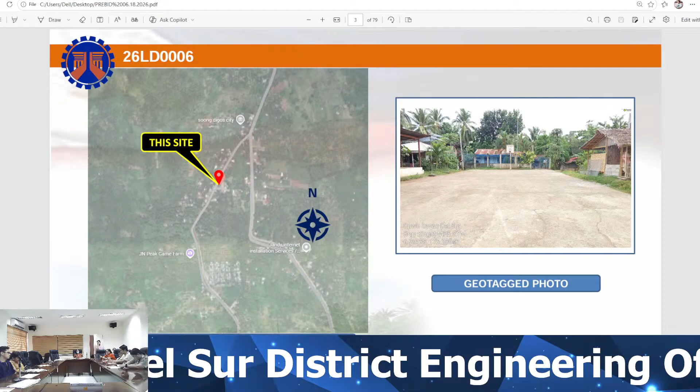For contract 26LD0006, contract name: construction of multi-purpose building gymnasium, Barangay Kiagot, Digos City, Davao del Sur, with appropriation amount of 8 million pesos and ABC amount of 7,920,000 pesos, with a contract duration of 150 calendar days, funded under 2026 GAA, RA 12314.

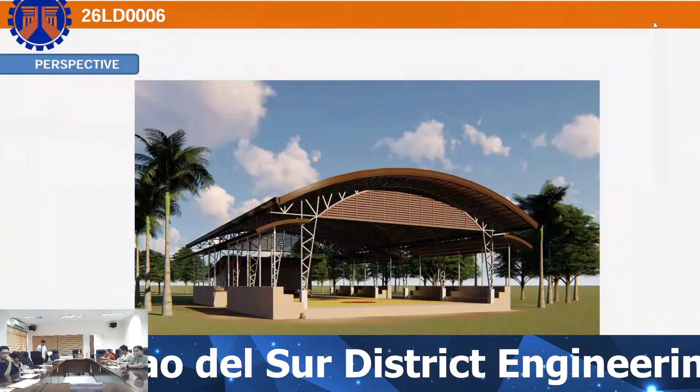Here's the perspective of our proposed gymnasium. The project will be located at Barangay Kiagot in Digos City.

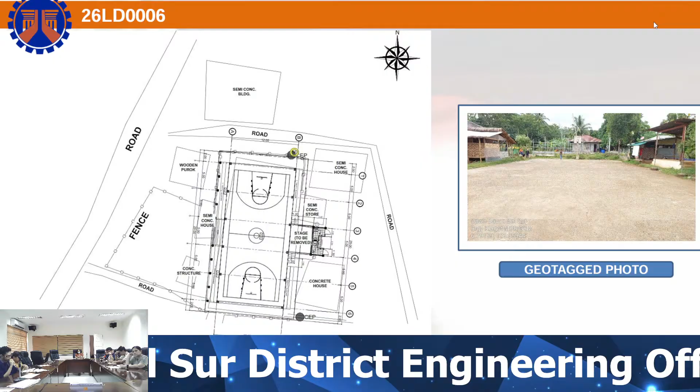Here's the vicinity map and geotag photo of the existing play court. Here's the site development plan for the project, which will be placed on the existing play court. The LGU provided a transfer certificate of title for the lot ownership.

For the scope of works, we have the 25 by 12 meters play court. The existing play court will be replaced with a new one.

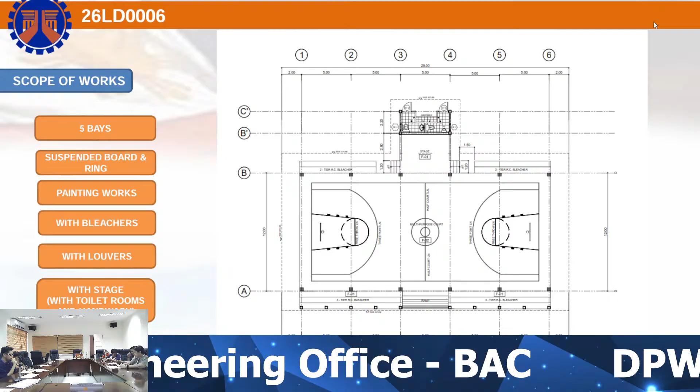Next, we have the suspended board and ring, painting works, bleachers - 2-tier at the upper side, 3-tier on the other side. Then we have the louvers, and we also included a new stage with toilet rooms and hand wash at the back.

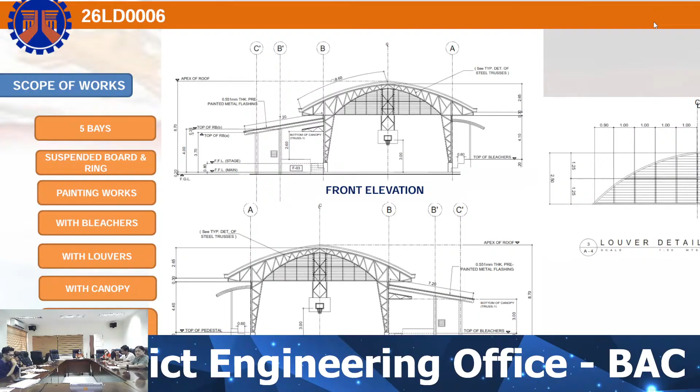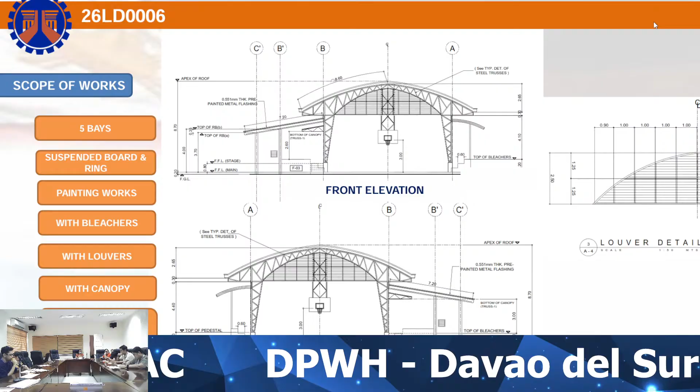Here's the elevation for the gymnasium, showing the front elevation, rear elevation, and louver details. Again, we have the 5 bays of trusses, the suspended board and ring, painting works, bleachers, louvers with canopy, and the stage.

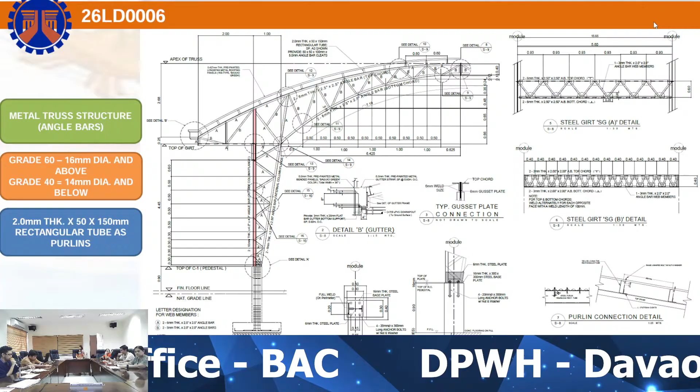The project will mainly be composed of metal truss structure with angle bars, then grade 60 and grade 40 reinforcing steel bars on the reinforced concrete pedestals, and 2mm thick by 50 by 150mm rectangular tube for the purlins. Here's the typical detail for the truss.

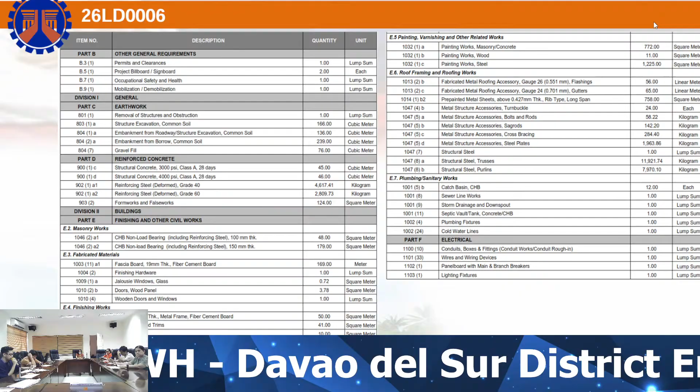For the summary of quantities, we have the general requirements, permits and clearances. Under earthwork, we have removal of structure or the existing play court, excavation and embankment. Then under reinforced concrete, you have the 3,000 and 4,000 PSI structural concrete, and reinforcing steel, grade 40 and grade 60.

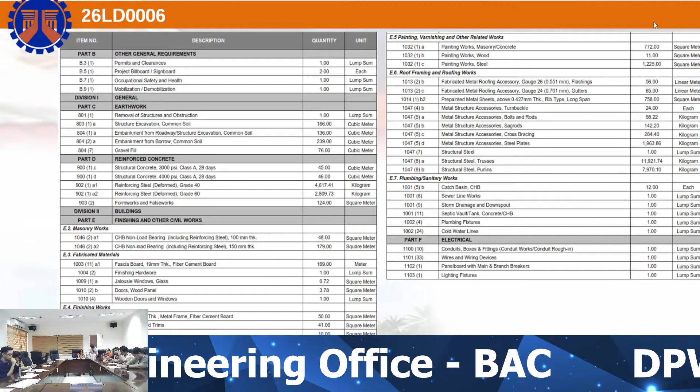Under finishing and other civil works, you have masonry works, fabricated materials such as doors and windows for the attached toilet. Finishing works such as tile works on the stage and toilet, reflective insulation, ceiling, painting works, roof framing and roofing works. Then under plumbing or sanitary works, we have the catch basin, sewer line works, plumbing fixtures, cold water lines, storm drainage and septic vault, and electrical works.

For contract ID 26LD0062, the contract name: Rehabilitation of Multipurpose Building Gymnasium, Remedios Saplala Elementary School, I-129756, Barangay Matti, Digos City, Davao del Sur, with appropriation amount of 5 million pesos, and ABC amount of 4,950,000 pesos, with a contract duration of 120 calendar days, funded under 2026 GAA or RA 12314.

This project is a rehabilitation for an existing gym. Here's the photo of the dilapidated gym. The project would be at Remedios Saplala Elementary School.

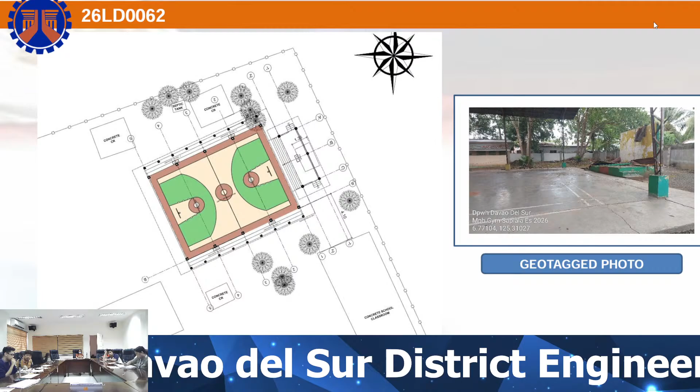Here's a site development plan showing the existing play court. The school provided an original certificate of title for the lot ownership. For the scope of works, we have...

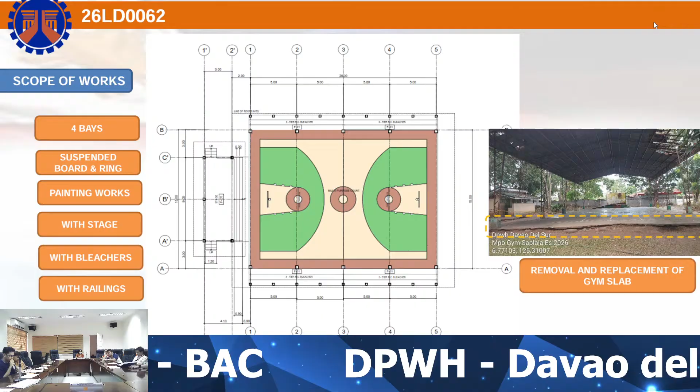An overlay, removal and replacement of the existing gym slab due to dilapidation. Then we would install a suspended board and ring, painting works on the play court and the whole structure. And we will replace the stage, and provide bleachers with railings.

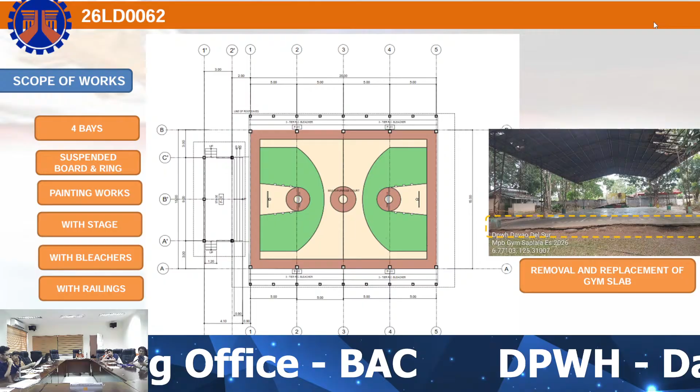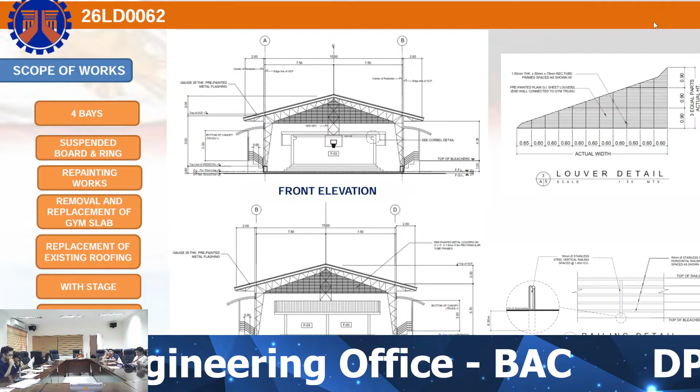Here's the elevation for the proposed rehabilitation. We provided a suspended board and ring, repainting of the whole structure, removal and replacement of the gym slab, replacement of the dilapidated existing roofing, then stage, bleachers, and railings. We have the 3-tier bleachers to be installed.

Here's the side elevation showing the bleachers with railings. We will replace the dilapidated roofing sheet and repaint the existing metal structures.

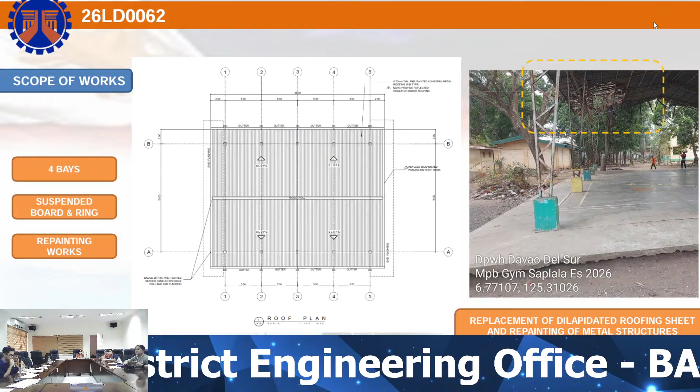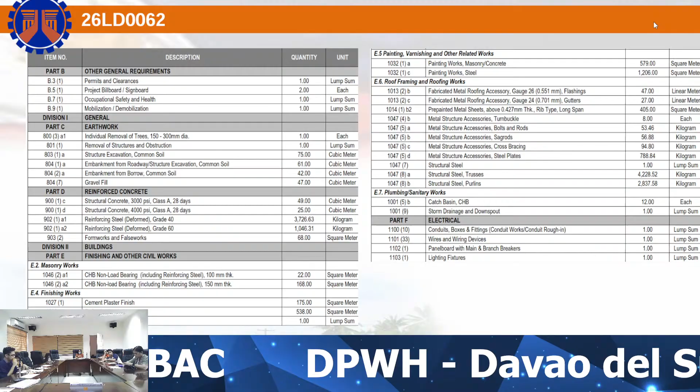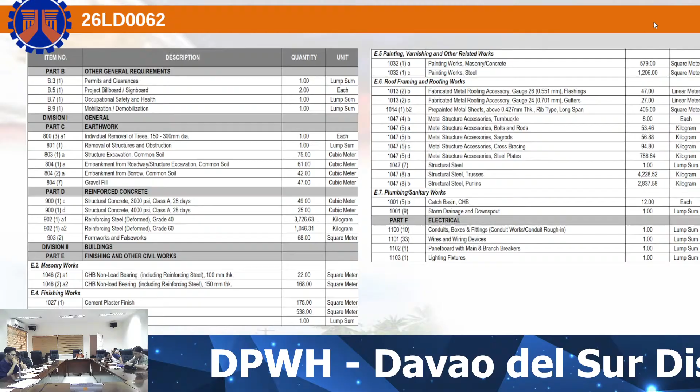For the summary of quantities, we have the general requirements, permits and clearances, earthwork which is removal of structure and embankment. Then under reinforced concrete, we have the 3,000 and 4,000 PSI structural concrete with grade 40 reinforcing steel. Under finishing and civil works, you have masonry works, finishing works, reflective insulation and railing, painting works, roof framing and roofing works, plumbing and sanitary which includes storm drainage, catch basin and downspout, and electrical works.

For contract ID 26LD0074, with contract name: construction of multi-purpose building, office building, Carubang, Astorga, Santa Cruz, Davao del Sur, with an appropriation amount of 5 million pesos, an ABC amount of 4,950,000 pesos, with a contract duration of 120 calendar days, under 2026 GAA or RA 12314.

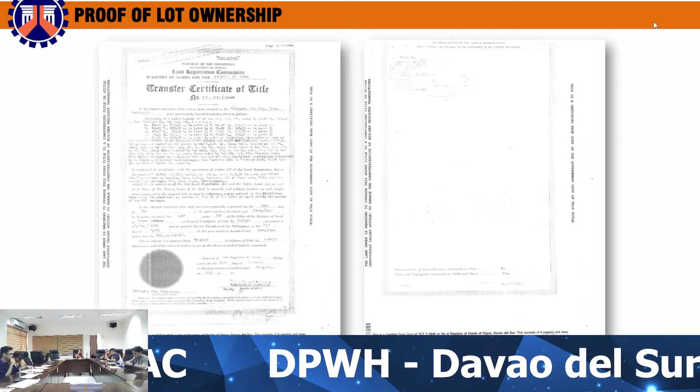Our project will be located at Carubang, Astorga, Santa Cruz. Here's a vicinity map, which is near Bison Elementary School. Here's the geotag photo. The LGU provided a transfer certificate of title for the lot ownership. Here's the site development plan showing the proposed building, which should be located near their existing gym and tribal hall.

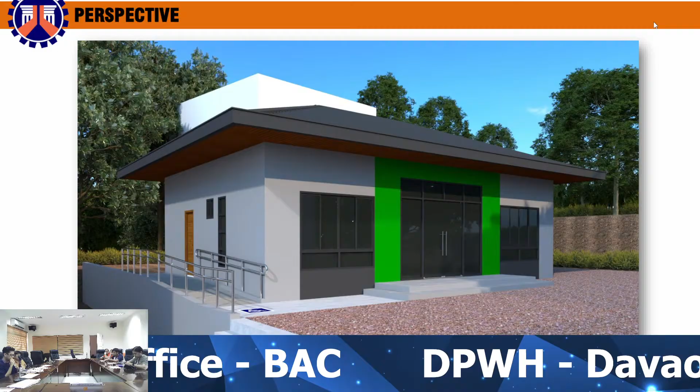So here's the proposed one-story building, office building for Carubang, Astorga.

Here's the floor plan, which has a total floor area of 96 square meters, with dimensions of 12 meters by 8 meters, with the spaces provided are the following: porch, clerical office, head office, pantry, male and female PWD toilet, room,

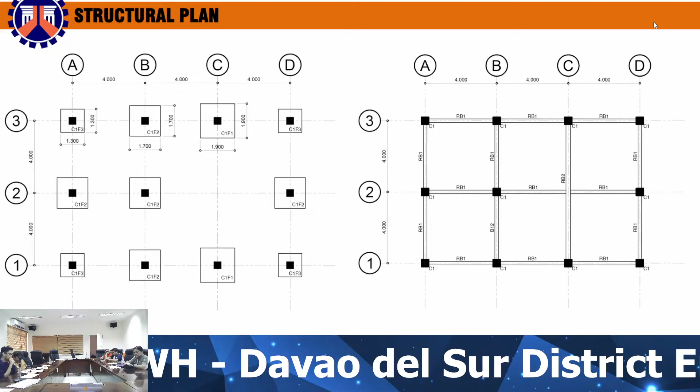and around. So the project will be composed of reinforced concrete columns and beams, next, and steel trusses for the roof framing.

So again, for the summary quantities, we have the general requirements, permits and clearances, earthwork, the removal structure, excavation, embankment, reinforced concrete. We have the 3,000 and 4,000 PSI structural concrete with grade 40 and grade 60 reinforcing steel.

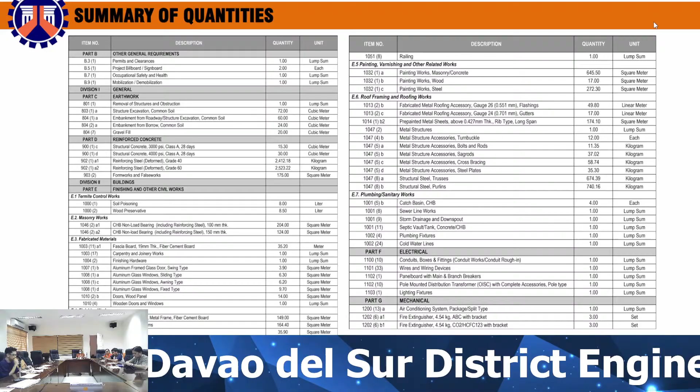Then under finishing and other civil works, you have the termite control works, soil poisoning and wood preservative, masonry works, fabricated materials such as the doors and the windows, finishing works such as the ceiling, tile works, and then we

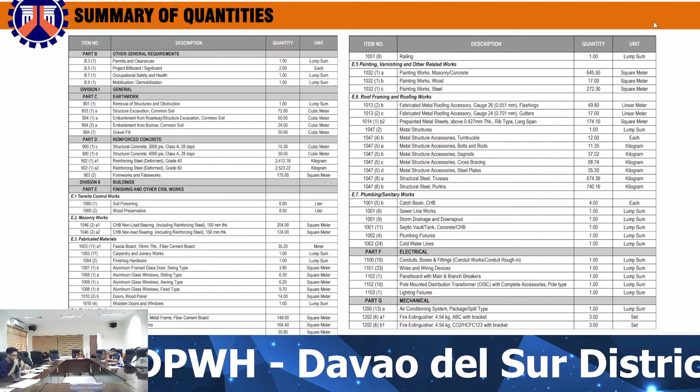have painting works, roof framing and roofing works, plumbing, which includes the catch basin, storm drainage and downspout, sewer line works, cold water lines, and septic vault.

Then electrical works, then under mechanical works, we have an air conditioning system and fire extinguishers provided.

For contract ID 26LD0109, or contract name, construction of multi-purpose building, sleeping quarters at Girl Scout, Barangay Matti, Digos, Davao del Sur, an appropriation amount of 9,500,000 pesos, ABC amount of 9,405,000 pesos, with a contract duration of 150 calendar days, funded under 2026 GAA or RA 12314.

So our project will be located at Barangay Matti at the Girl Scout compound. Their office provided a transfer certificate of title for the lot ownership.

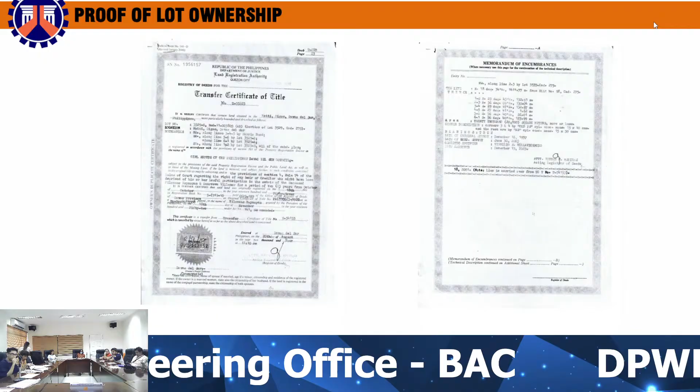Next. So here's our proposed one-story building. It will serve as sleeping quarters or a training hall as well.

So next, here's an open plan. Here's our floor plan with 250 square meters floor area or 10 meters by 25 meters dimension with the spaces provided: a main entrance, sleeping quarters, and will be served also as a function hall as well.

So it's an open plan. Restrooms for the male and the female, also catering to PWD, mess hall, and then service entrance or emergency exit.

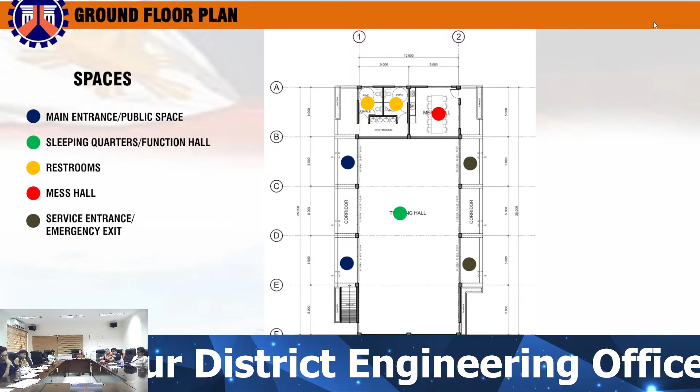The building would mainly be composed of wide flange beams and columns or I-beams.

So for the summary of quantities, we have the general requirements, the permits and clearances. Earthwork, we have the embankment, excavation, reinforced concrete, we have the 3,000 and 4,000 PSI structural concrete, grade 40 and grade 60 reinforcing steel.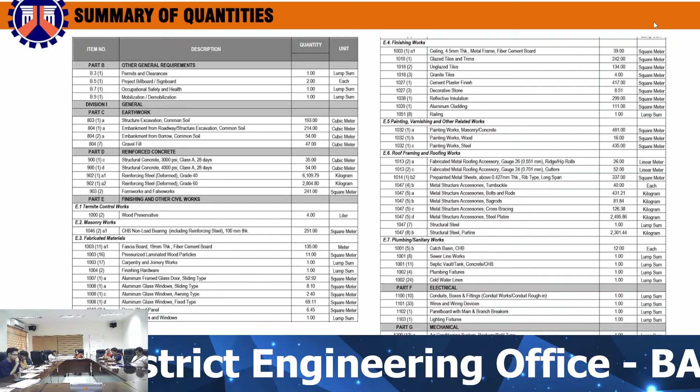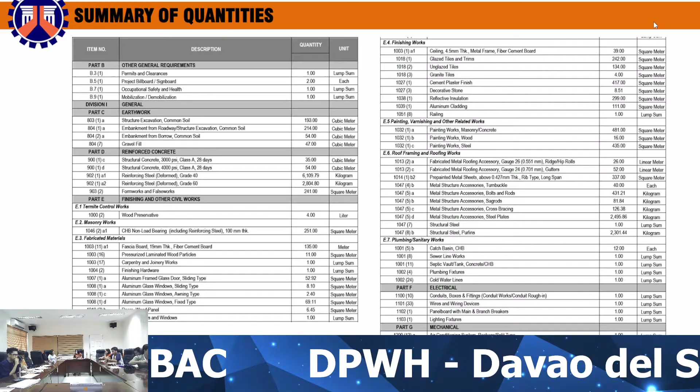Under finishing and other civil works, we have the termite control works, masonry works, fabricated materials as the doors and the windows, finishing works as the ceiling, tile works, cladding.

Then we have the painting works, roof framing and roofing works. Then we have the plumbing or sanitary works, catch basin, sewer line works, plumbing fixtures, septic vault, electrical works. Then under mechanical works, we provided an air conditioning system and fire extinguishers.

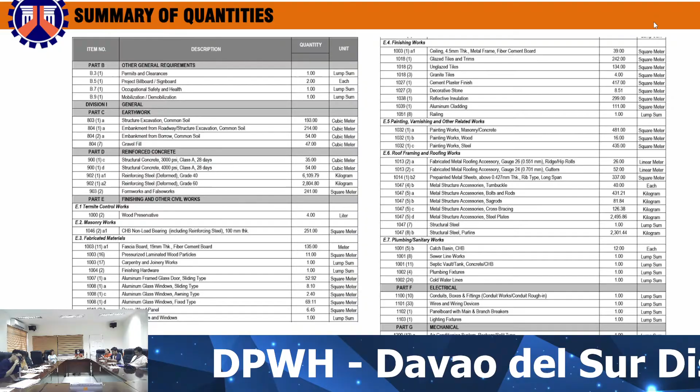For contract ID 26LD0110, with contract name, construction of multipurpose building, dormitory building at Davao del Sur State College, Digos City, Davao del Sur, an appropriation amount of 10 million pesos, an ABC amount of 9,900,000 pesos, with a contract duration of 150 calendar days, funded under 2026 GAA or RA 12314.

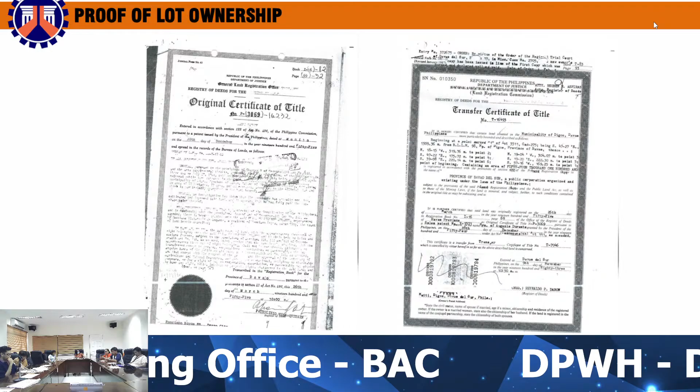So this project is a progressive type project. Here's the proposed perspective, but due to lack of funding, this is a progressive type. So it would only include the structural components of the building,

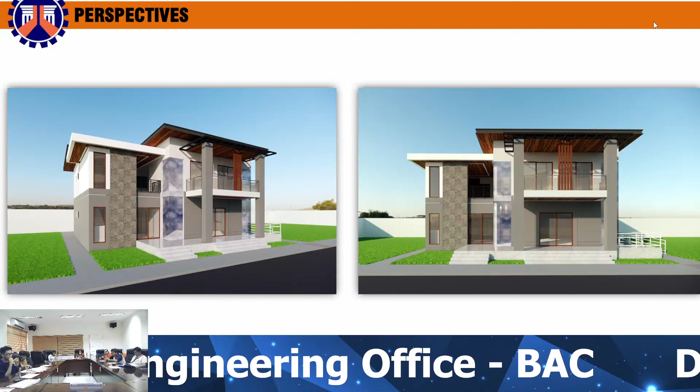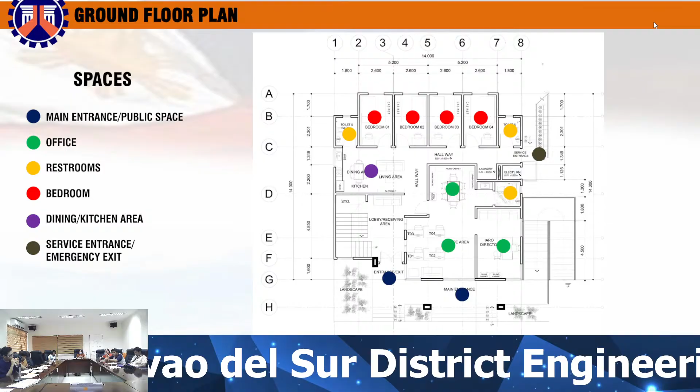so unfinished. So here's the proposed floor plan with the dimension of 14 meters by 14. Spaces provided: an entrance, office, restrooms, bedroom, dining, kitchen area.

So again, this project would only include the structural elements, the columns and beams on the roofing, and the slab on the second floor. So this is a progressive type project, and it is a two-story building.

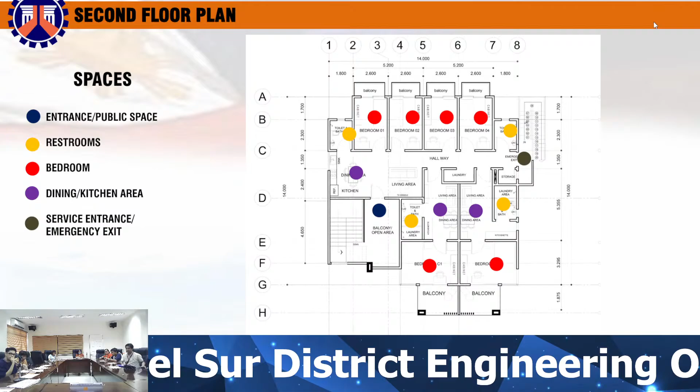So this is the second floor plan. It has the entrance, restroom, bedroom, dining, service entrance, and fire exit.

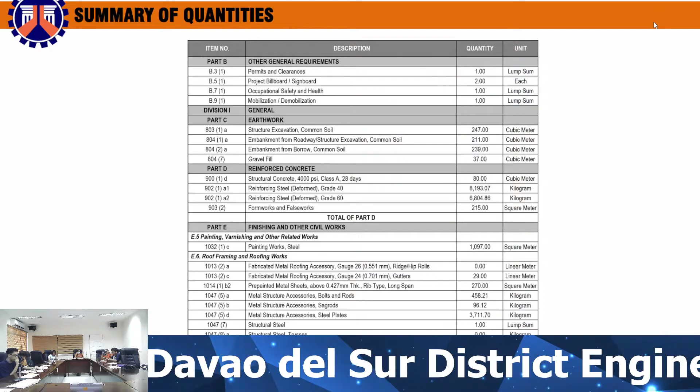So for the summary of quantities, we have the general requirements, the permits and clearances, earthwork, embankment, excavation. Then under reinforced concrete, we have the 4,000 PSI structural concrete only, with reinforcing steel grade 40 and grade 60.

Then under finishing and other civil works, we only provided the painting works for the steel structure, the I-beams, then roof framing and roofing works.

So for contract ID 26LD0117, with the contract name, construction of multipurpose building, feeding center, Asturga CES or Central Elementary School, Santa Cruz, Davao del Sur, an appropriation amount of 5 million pesos, an ABC amount of 4,950,000 pesos, with a contract duration of 120 calendar days, funded under 2026 GAA or RA 12314.

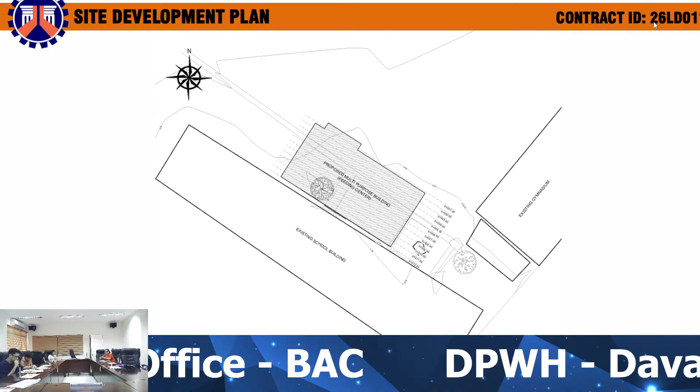Next. So our building will be located right in front of their existing school building and near an existing gymnasium.

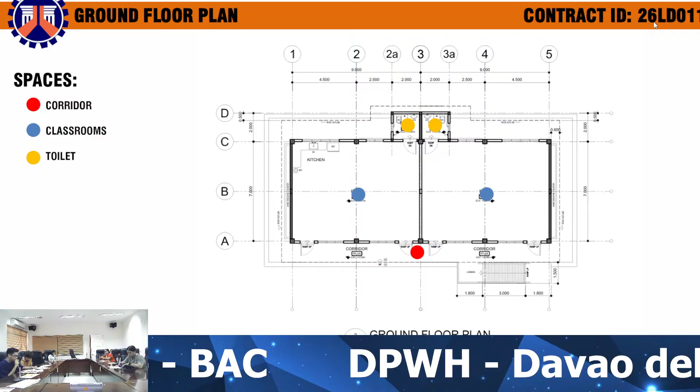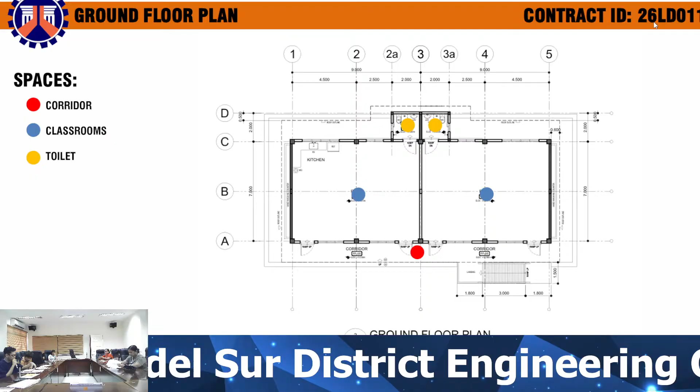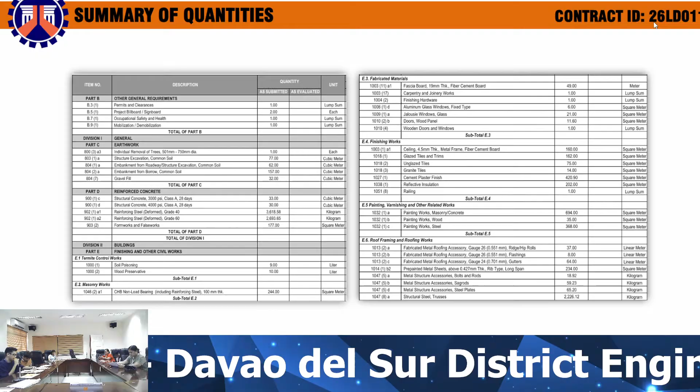But this would cater as a feeding center, so we provided a kitchen and attached toilet. The project would be composed of reinforced concrete columns and beams and steel truss for the roof framing. So for the summary of quantities, we have the general requirements, permits and clearances, earthwork, individual removal of tree, structure excavation, and embankment.

Then we have the reinforced concrete, the 3,000 and 4,000 PSI structural concrete, and grade 40 and grade 60 reinforcing steel. Under finishing and other civil works, we have termite control works, masonry works, fabricated materials such as doors and windows, finishing works such as ceiling, tile works, and reflective insulation, painting works, roof framing and roofing works.

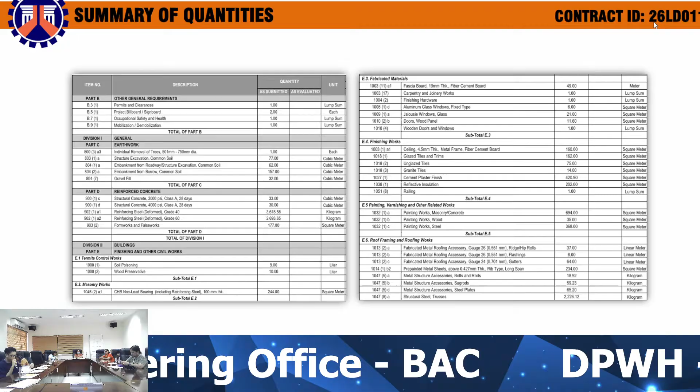Then we have the plumbing or sanitary works, which includes the septic vault, catch basin, storm drainage and downspout, cold water line and sewer line works. Electrical works, then mechanical works, we provided a fire extinguisher and smoke detector.

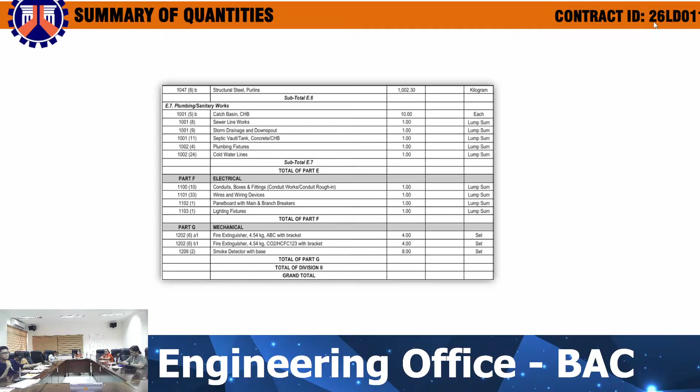For contract ID 26LD0120, with the contract name Construction of Multipurpose Building, Hall of Justice, Davao del Sur, with an appropriation amount of 5 million pesos, and ABC amount of 4,950,000 pesos, with a contract duration of 120 calendar days, funded under 2026 GAA or RA 12314.

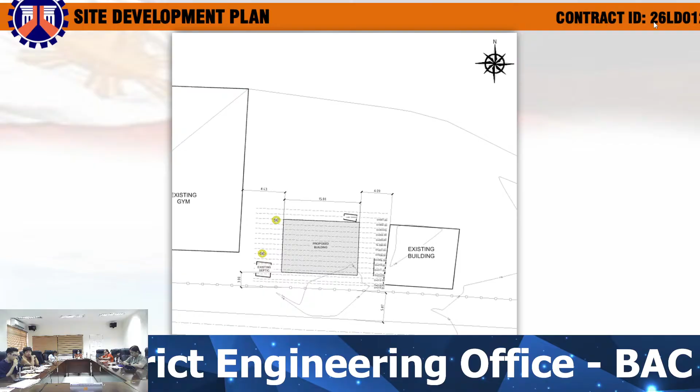So the project would be located at the municipal site of Parada. Here's the geotag photo of the existing Hall of Justice. The existing Hall of Justice would be replaced with a new one, or to be demolished. Here's the site development plan. The LGU provided an original certificate of title for the lot ownership.

Here's a proposed one-story building, Hall of Justice, perspective. The building will be composed of reinforced concrete columns and beams and steel trusses. For the floor plan, we have a total floor area of 120 square meters, with a dimension of 15 meters by 8 meters.

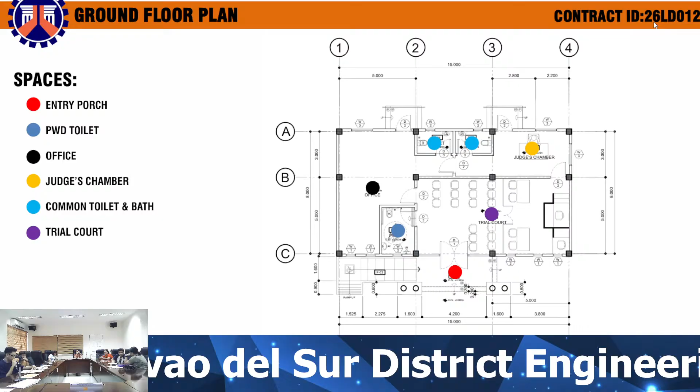Spaces are provided as the following: an entry porch, PWD toilet, office, judge chamber, common toilet and bath, and trial court.

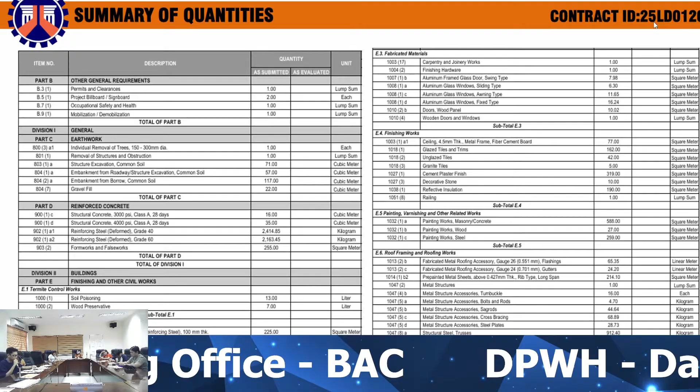For the summary of quantities, we have the general requirements, the permits and clearances. Earthwork, we have the individual removal of tree and removal of structure or demolition of the existing building, and embankment. Then under reinforced concrete, we have the 3,000 and 4,000 PSI structural concrete and the grade 40 and grade 60 reinforcing steel.

Then under finishing and other civil works, we have the termite control works including soil poisoning and wood preservative, masonry works, fabricated materials such as doors and windows, finishing works such as ceiling, tile works, and reflective insulation, painting works, roof framing and roofing works.

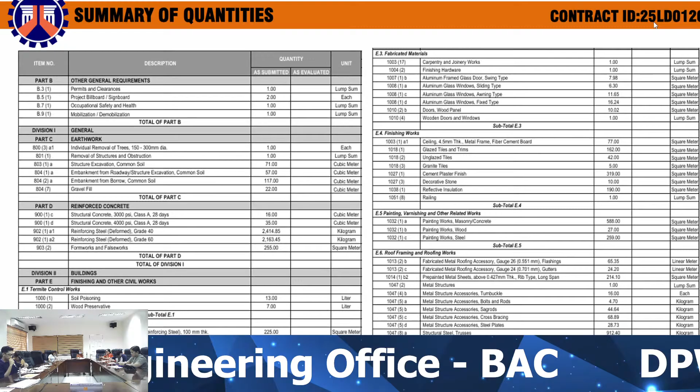Plumbing or sanitary works, which includes a catch basin, storm drainage and downspout, sewer line and cold water lines, the septic vault and plumbing fixtures, electrical works, and under mechanical works, we provided an air conditioning system and fire extinguishers.

For contract ID 26LD0197, with the contract name Construction Completion of Multipurpose Building, Barangay Center, Barangay Linawan, Bansalan, Davao del Sur, new appropriation amount of 3 million pesos, and ABC amount of 2,970,000 pesos, with a contract duration of 70 calendar days, funded under 2026 GAA or RA 12314.

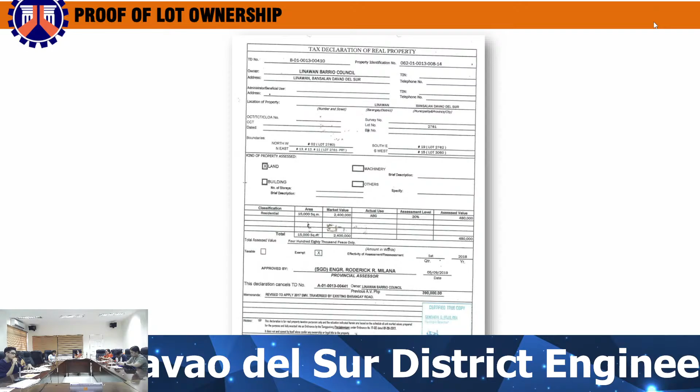So here's the vicinity map, which is located at the barangay site of Linawan. And here's the existing photo of the existing building to be rehabilitated. The LGU provided a tax declaration for the lot ownership.

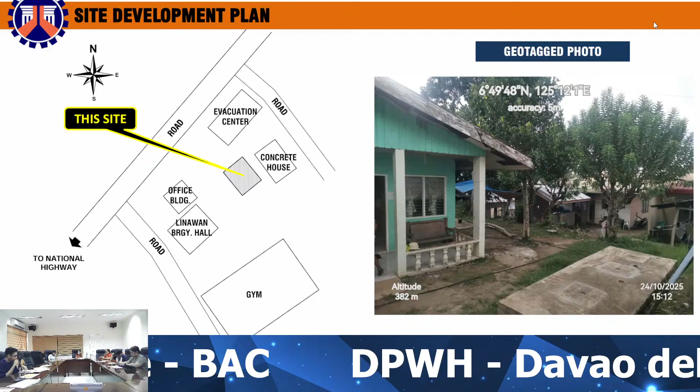So this is a development plan showing the project to be rehabilitated, or the existing building, which is right at the back of Linawan Barangay Hall.

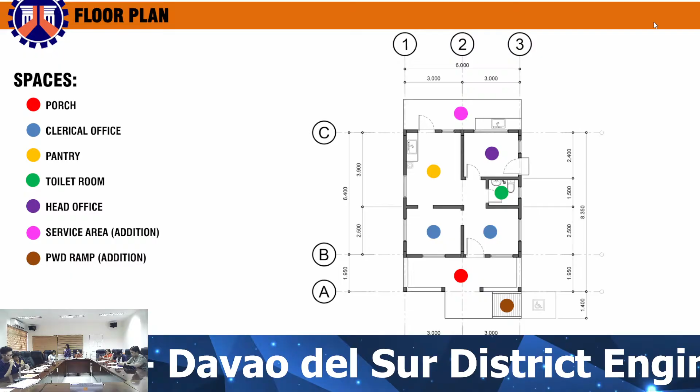So again, the scope of works: we have the repainting of the whole building, replacing of all doors and windows, replacement of the dilapidated exterior and interior ceiling, replacement of the framing and roofing, dilapidated roof, replacement of floor tiles, and replacement of the existing kitchen counter.

Then we have to add a PWD ramp at the front of the building, and then the replacement of interior drywalls into CHB walls, and repainting of the interior walls and the ceiling. We will also provide downspouts, gutter and catch basin for the building, and we will also replace the electrical wirings and fixtures.

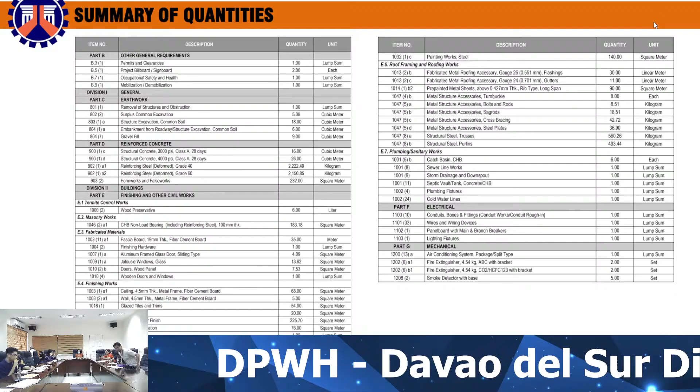So for the summary of quantities, we have the general requirements, permits and clearances, earthwork, reinforced concrete at 3,000 to 4,000 PSI, grade 40 and grade 60 reinforcing steel. Under finishing and other civil works, we have the wood preservative for the replacement of the doors and windows.

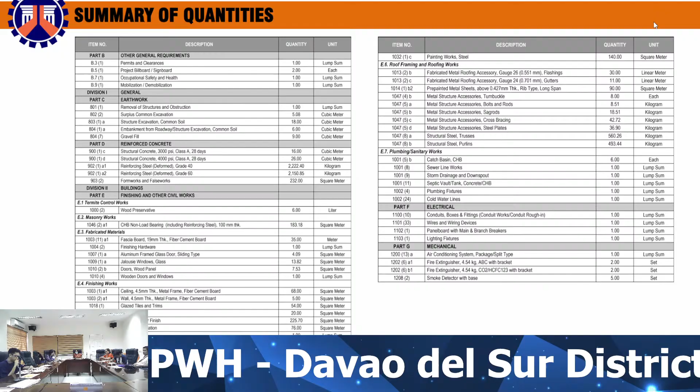Masonry works, fabricated materials on the doors and windows. Finishing works such as the tile works in the ceiling, painting works, roofing and roof framing and roofing works, plumbing. Then we have electrical and mechanical, which we provided an air conditioning system, fire extinguishers and smoke detector.

Lastly, for contract ID, 26LD0201, or the contract name construction of multi-purpose building, Municipal Disaster Risk Reduction and Management Office in Bansalan, Davao del Sur, with an appropriation amount of 10 million pesos, an ABC amount of 9,900,000 pesos, with a contract duration of 150 calendar days, and funded under 2026 GAA or RA 12314.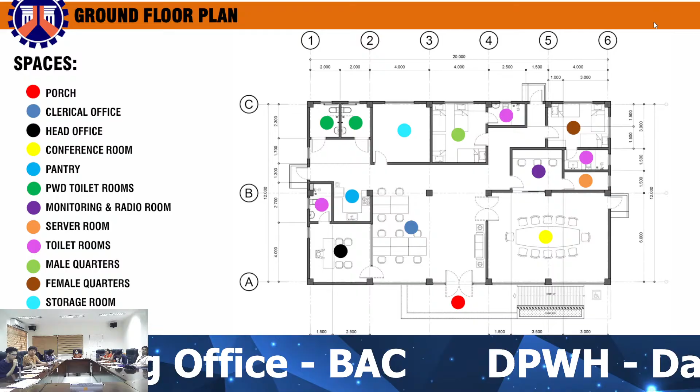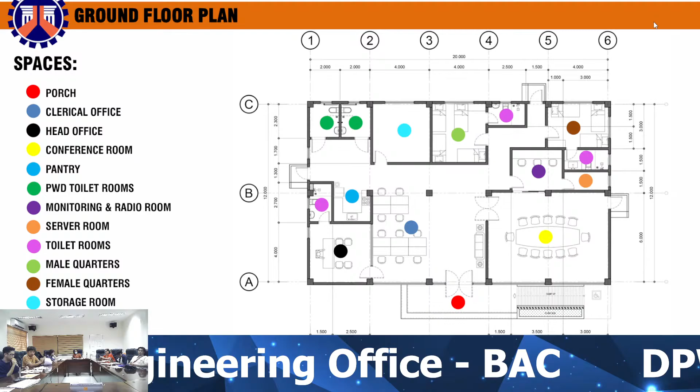So the building has a total floor area of 240 square meters, or with the dimensions of 20 meters by 12 meters. Spaces provided are the following: a porch, clerical office, head office, conference room, pantry, PWD toilet rooms, monitoring and radio room, server room, toilet rooms, male and female quarters, then storage room.

The building would mainly compose of reinforced concrete columns and beams, and steel trusses for the roof framing.

So for the summary of quantities, we have the general requirements, the permits and clearances. On the earthwork, we have the removal of trees, excavation and embankment. Under reinforced concrete, we have 3,000 and 4,000 PSI structural concrete, and then the grade 40 and grade 60 reinforcing steel.

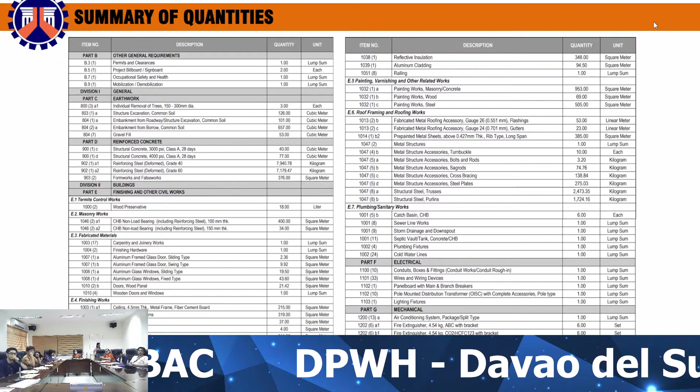Under finishing and other civil works, we have termite control works, masonry works, fabricated materials such as the doors and windows, finishing works such as the ceiling, tile works, reflective insulation and cladding, painting works, roof framing and roofing works, plumbing and sanitary works, which includes a catch basin, storm drainage and downspout, sewer line and cold water line, plumbing fixtures and septic vault, electrical works, and under mechanical works, we provided an air conditioning system, fire extinguisher, and smoke detector. That's it for the building projects.

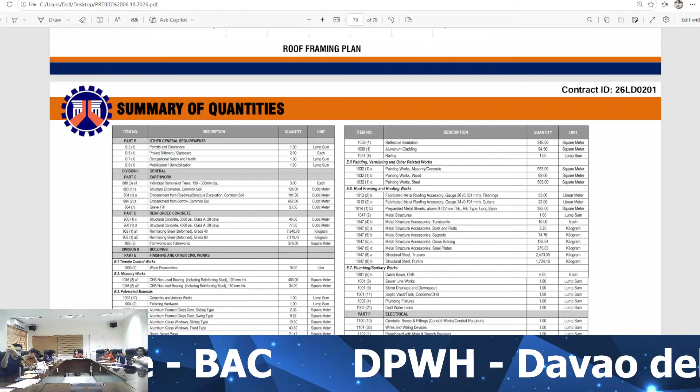For agenda number 1B, the requirement of bidding documents, including instruction to bidders, general condition of contract, special condition of contract, specification, drawings, bill of quantities, and forms. And for agenda number 1C, the documents to be submitted by the bidders.

And for agenda number 1D, the criteria and procedure for eligibility check, preliminary examination of bids, detailed evaluation of bids, post-qualification, and award. This to be discussed by Engineer Achilles Remedios.

In the bid, the first bid envelope shall contain the following technical documents, including the eligibility documents. First, valid PhilGEPS registration certificate, platinum membership, all pages, in accordance with Section 20 of the IRR of RA 12009. QR code must be clear and readable.

Failure of the bidder to update its PhilGEPS certificate of registration with the current and updated supporting documents shall result in the automatic suspension of the bidder's certificate. Second, special PCAB license and registration in case of joint venture.

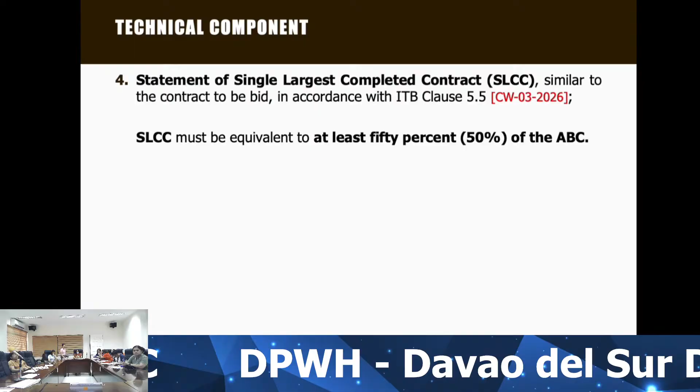SLCC must be equivalent to at least 50% of the ABC. Use the prescribed template provided in the bidding documents.

Attachments: 1. Copy of contract. 2. Copy of certificate of completion. And 3. Copy of certificate of final acceptance issued by the project owner other than the contractor, or a final rating of at least satisfactory in the constructor's performance evaluation system. In case of contracts with the private sector, an equivalent document shall be submitted.

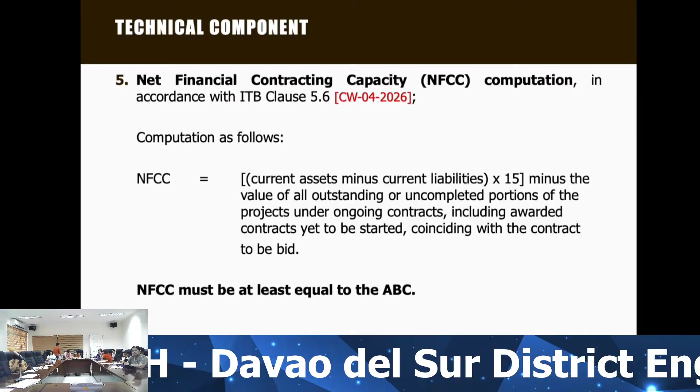Fifth, net financial contracting capacity, or NFCC computation, in accordance with instructions to bidders, clause 5.6. Computation as follows: current assets minus current liabilities multiplied by 15, minus the value of all outstanding or uncompleted portions of the projects under ongoing contracts, including awarded contracts yet to be started, coinciding with the contract to be bid.

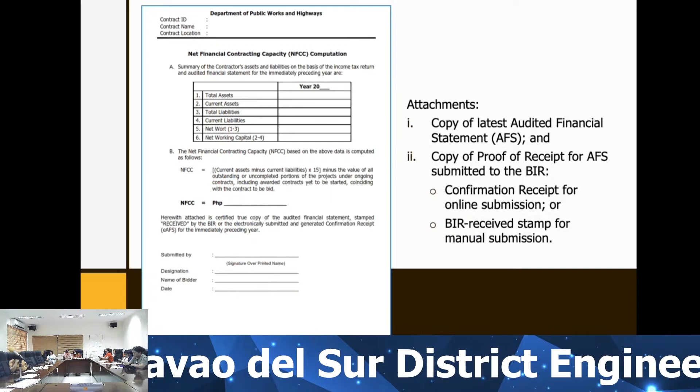NFCC must be at least equal to the ABC. Use the prescribed template provided in the bidding documents. Attachments: 1. Copy of latest audited financial statement, or AFS. And 2. Copy of proof of receipt for AFS submitted to the BIR. Confirmation receipt for online submission, or BIR-received stamp for manual submission.

Sixth, joint venture agreement, if applicable. Joint ventures may participate, provided that the primary purpose of each member must be similar or related to the requirements of the project. Each member of the joint venture shall be jointly and severally liable to the procuring entity in case of breach or failure to comply with the requirements of the project.

Seventh, bid security in the prescribed form and amount in accordance with instructions to bidders, Clause 16, and validity period under Clause 15. The bid security shall be in the form of a bid securing declaration or any of the following: an amount of not less than 2% of the ABC if bid security is in cash, or an amount of not less than 5% of the ABC if bid security is in surety bond. Bids and bid security shall be valid for 120 calendar days from bid opening.

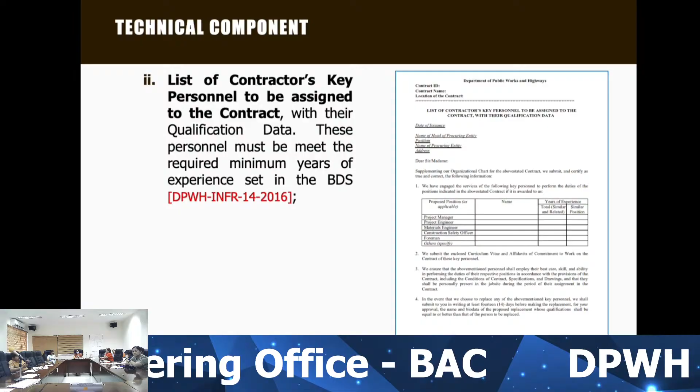Eighth, project requirements, which shall include the following: 1. Organizational chart for the contract. Use the prescribed template provided in the bidding documents. 2. List of contractors' key personnel to be assigned to the contract with their qualification data. These personnel must meet the required minimum years of experience set in the bid data sheet.

Use the prescribed template provided in the bidding documents. Attachments: letter of nominee, notarized certificate of employment, biodata, copy of PRC ID, PTR, TIN, and certificate of accreditation and/or training. Key personnel, particularly the project manager, project engineer, and materials engineer, must be different persons.

Accredited safety officer required upon issuance of notice of award, subject to Department Order Number 35, Series of 2021. First aider with certificate of training issued by the Red Cross, in compliance with Department of Labor and Employment requirements for the approval of construction safety and health program, required upon issuance of notice of award, subject to Department Order Number 35, Series of 2021. Compliance to DOLE Department Order Number 252, Series of 2025, revised implementing rules and regulations of Republic Act Number 11058, entitled An Act Strengthening Compliance with Occupational Safety and Health Standards and Providing Penalties for Violations thereof.

3. List of contractors' major construction and laboratory equipment units to be assigned to the contract, supported by certifications of availability, which must meet the minimum requirements for the contract set in the bid data sheet. Use the prescribed template provided in the bidding documents.

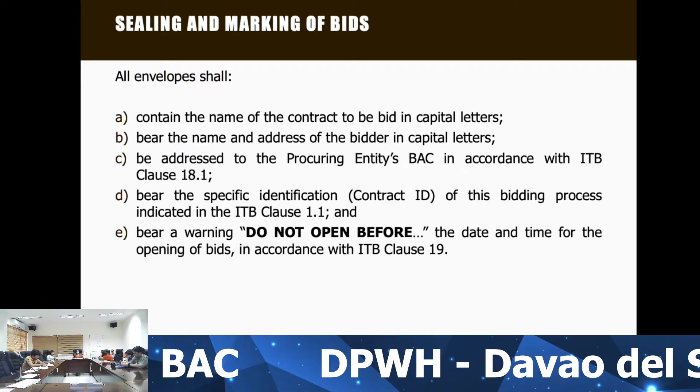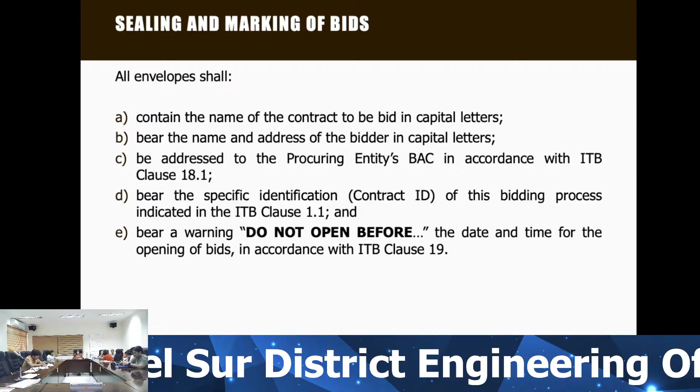All envelopes shall contain the name of the contract to be bid in capital letters, bear the name and address of the bidder in capital letters, be addressed to the procuring entity's bids and awards committee in accordance with ITB Clause 18.1, bear the specific identification of this bidding process indicated in ITB Clause 1.1, and bear a warning, do not open before the date and time for the opening of bids in accordance with ITB Clause 19.

For manually submitted bid envelopes that are not properly sealed and marked as required in the bidding documents, the same shall be accepted, provided that the bidder or its duly authorized representative shall acknowledge such condition of the bid as submitted. On the other hand, unsealed or unmarked bid envelopes, or bids that cannot be opened or are corrupted in case of online submission, shall be rejected. The Bids and Awards Committee shall assume no responsibility for misplaced or lost contents of the improperly sealed or marked bid, or for its premature opening.

Bid documents must be prepared on A4 size paper and properly labeled with ear tag, matching those on the checklist. All supporting documents, photocopied from the original, shall be legibly readable and will be authenticated as needed during the post-qualification process. Illustration for the sealing and marking of bids.

The bidder shall submit one original and one copy of the technical and financial components of its bid. Submission and receipt of bids.

Bid submission may be done manually or electronically. However, bidders should only select one mode of submission, either manual or electronic online. For bids to be submitted manually, bids must be duly received by the Bids and Awards Committee Secretariat on or before the scheduled date set in the bidding documents. For bids to be submitted electronically online, bidders should observe the guidelines for the electronic submission and receipt of bids as per Department Order Number 87, Series of 2020.

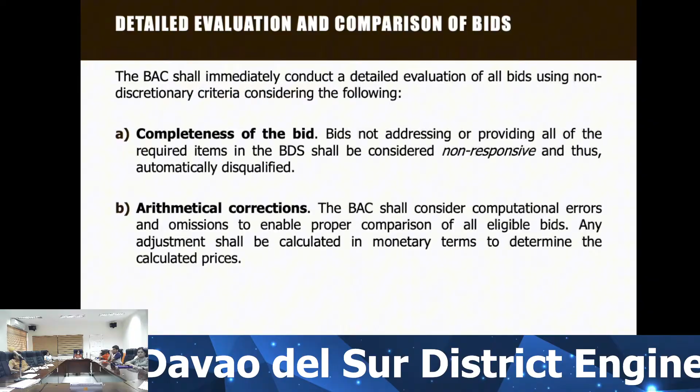A. Completeness of the bid. Bids not addressing or providing all of the required items in the bid data sheet shall be considered non-responsive and thus automatically disqualified. B. Arithmetical corrections. The BAC shall consider computational errors and omissions to enable proper comparison of all eligible bids. Any adjustment shall be calculated in monetary terms to determine the calculated prices.

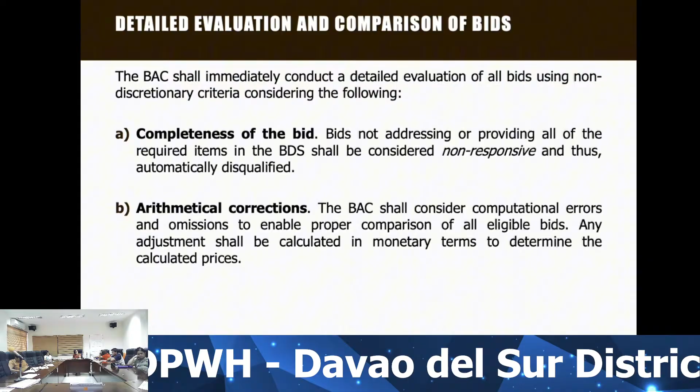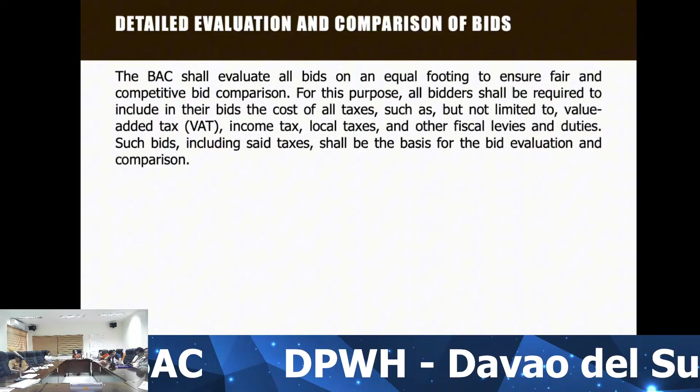The BAC shall evaluate all bids on an equal footing to ensure fair and competitive bid comparison. For this purpose, all bidders shall be required to include in their bids the cost of all taxes, such as, but not limited to, value-added tax, income tax, local taxes, and other fiscal levies and duties. Such bids, including said taxes, shall be the basis for the bid evaluation and comparison.

Post-qualification. The BAC shall determine to its satisfaction whether the bidder that is evaluated as having submitted the lowest calculated bid complies with and is responsive to all the requirements and conditions specified in ITB Clause 5 and 12. The determination shall be based upon an examination of the documentary evidence of the bidder's qualifications submitted pursuant to ITB Clause 12, as well as other information as the procuring entity deems necessary and appropriate, using a non-discretionary pass or fail criterion, which shall be completed within a period of 12 calendar days.

If the BAC determines that the bidder with the LCB passes all the criteria for post-qualification, it shall declare the said bid as the lowest calculated responsive bid and recommend to the head of the procuring entity the award of contract to the said bidder at its submitted bid price or its calculated bid price, whichever is lower.

Reservation clause. Notwithstanding the eligibility or post-qualification of a bidder, and without incurring any liability, the head of the procuring entity at any stage of the procurement reserves the right to review its qualifications, reject any and all bids, declare a failure of bidding, or not award the contract in the following situations: A. If it has reasonable grounds to believe that a misrepresentation has been made by the said bidder; or B. If it has reasonable grounds to believe that there has been a change in the bidder's capability to undertake the project from the time it submitted its eligibility requirements.